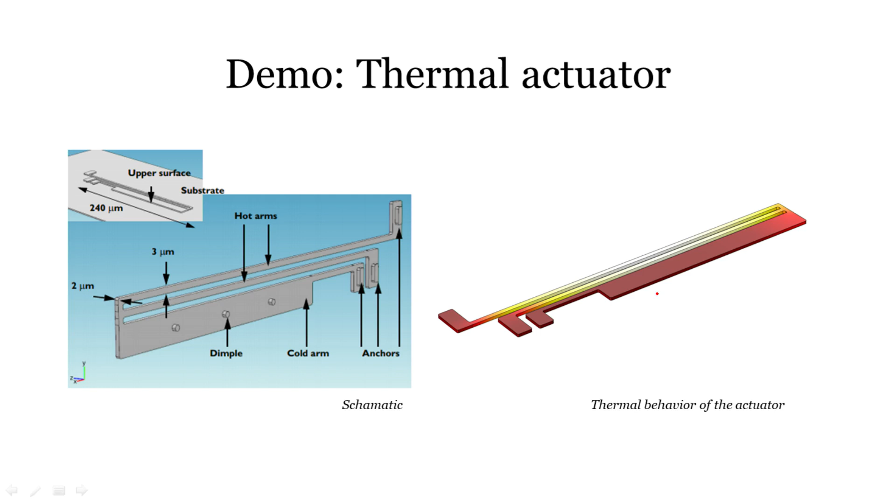within tens of micrometers. So let us see how to actually model this kind of a multi-physics coupling, because over here there are 3 physics that are going to get into the picture. The first physics is the input current that we give. Because of the input current or the voltage that we give, there would be a certain rise in temperature because of Joule losses, and because of the Joule losses there is going to be some kind of thermal expansion, because each material has its own thermal expansion coefficient. This is what we are going to couple.

We are going to couple the electrical physics with the thermal physics and the structural physics, which leads to deformation. Our end goal is to see if we change the voltage, how much is the maximum displacement the thermal actuator gives. So let us go and try to understand the physics step by step. The first physics is the electrical physics.

So in the circuit that you can see over here, we actually are going to apply a particular voltage at one of the edges over here, that is one of the anchors over here, and we are going to put the ground somewhere over here. The voltage which we give could be actually coming through a very big circuit. Let us now go to COMSOL.

So this is the first screen that you will see once you open COMSOL. If you are a little bit experienced, you can go ahead and make a blank model. So you don't need to add any physics. Just one click will lead you to a completely new, blank model. The model wizard is a step by step process to make or initialize your model. So let us click on model wizard, and it's asking us for the space dimension, whether you want to make a three-dimensional object, 2D axisymmetry, 1D axisymmetry, 1D or 0D. So let us go ahead with 3D.

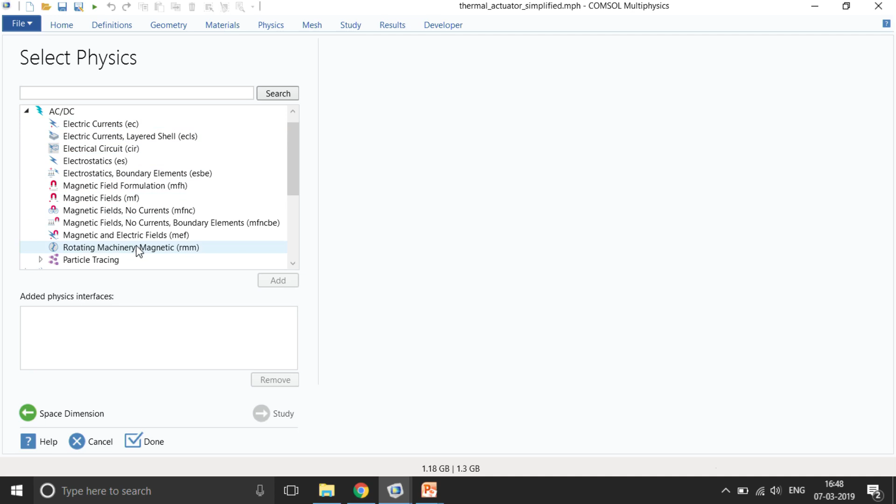So let us go into the AC/DC module. So this is the AC/DC part, and in this AC/DC part there are a lot of different interfaces: electric currents interface, magnetic fields interface, rotating machinery magnetic interface where you can model motors. As of now, we will go ahead with only the electric currents. This specific interface is to model currents through conductors. If you are talking about capacitors, then you need electrostatics. So let us go with electric currents and add.

So I can go to the next part, the study. Here there are many different kinds of studies we can perform. We can do frequency domain study, which allows us to do harmonic input. We have stationary study, where we can do a steady state analysis, that is we give only a particular voltage. Then we have time dependent study, which gives you transient analysis of your complete system. So all these three different kinds of study can be performed. Along with this, we have small signal analysis, wherein we give a particular DC bias along with the AC component. So let us go with a stationary analysis and click on done.

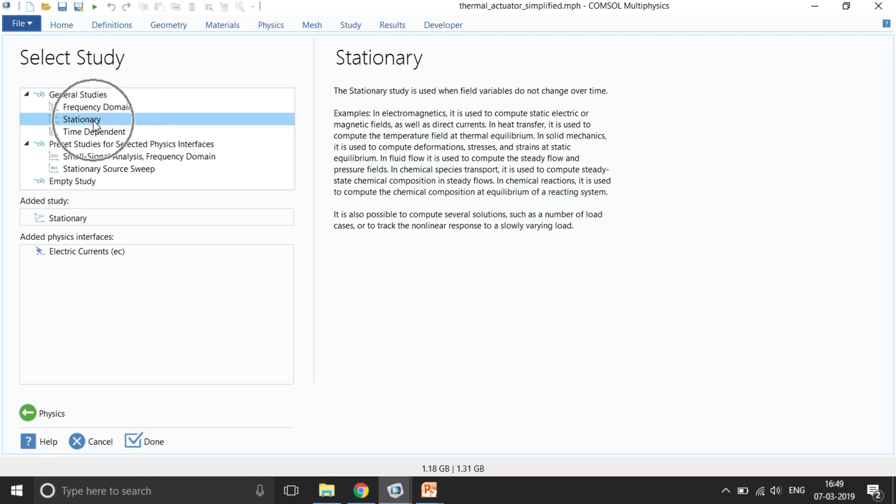So the approach that you can follow in COMSOL is the top to bottom approach. That is, you first create the geometry, add the material, add the physics, then perform the meshing, then you choose which kind of analysis you want to perform, and finally the results. So this is a top to bottom approach that usually is preferred in COMSOL.

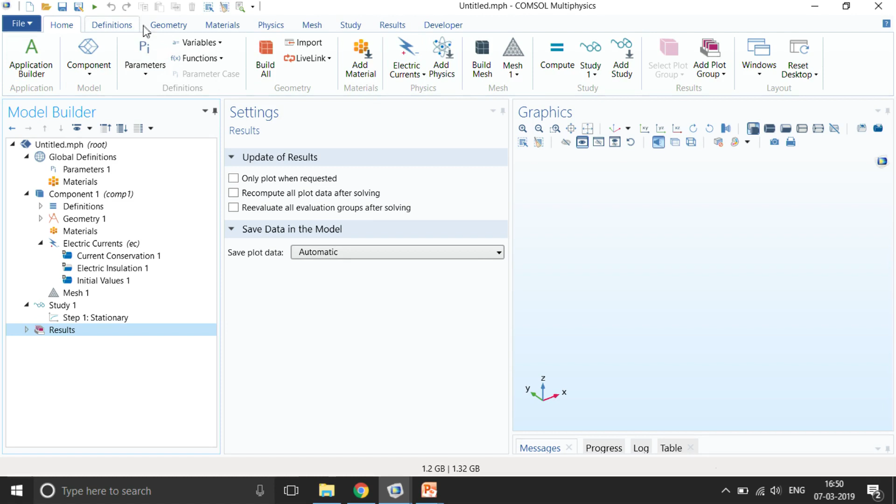One more approach which is preferred is in the ribbon pane that you can see in the top. Here you can see the same thing that you have already seen in the model builder. You have to first create the geometry, add the materials, apply the physics, perform the meshing, choose which kind of analysis you want to perform, then finally the results, that is to analyze your results.

We also have one more block as developer, that is if you want to write your own code along with the code that is being solved by COMSOL. So the first thing is to make the geometry. However, to save the time, I am going to import the geometry. There are two ways to import the geometry.

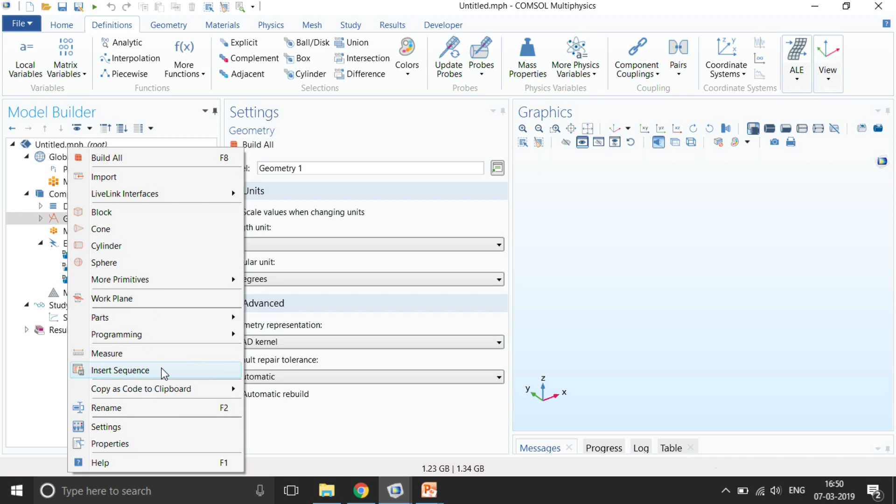One is to import through some other tool, any other CAD tool, and if you want to insert a sequence, which is like a step by step process to make the geometry, from a pre-built COMSOL file, you can use insert sequence. So let me choose insert sequence, and I choose the model that I have already created, and I click on zoom extents. So this is the geometry that is already available in the library file.

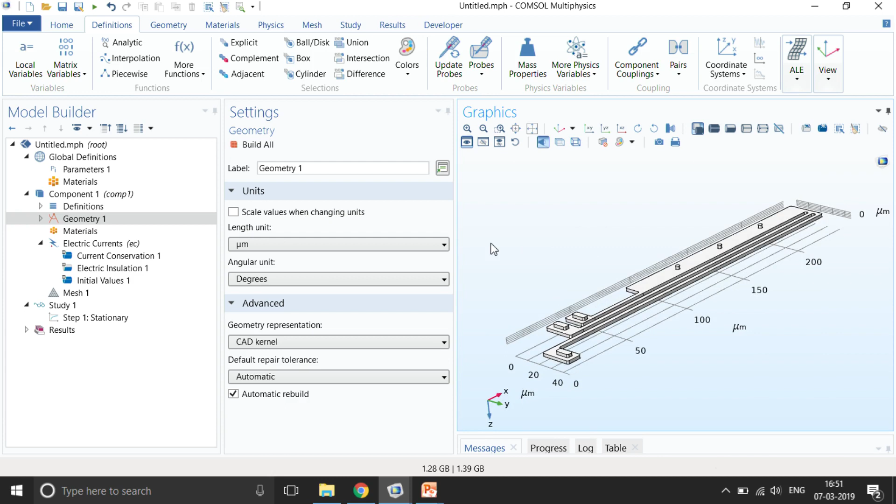So if you want to go through this example model, which is also known as thermal actuator, you can go to file, application library, and just search for thermal actuator, and you will see the thermal actuator model file available over here. So I have added the geometric sequence, as you can see over here.

The next thing is to add the materials. So let me just add the material by right clicking the material, add material from library. I can go ahead in the built in, and I can have the polysilicon material property.

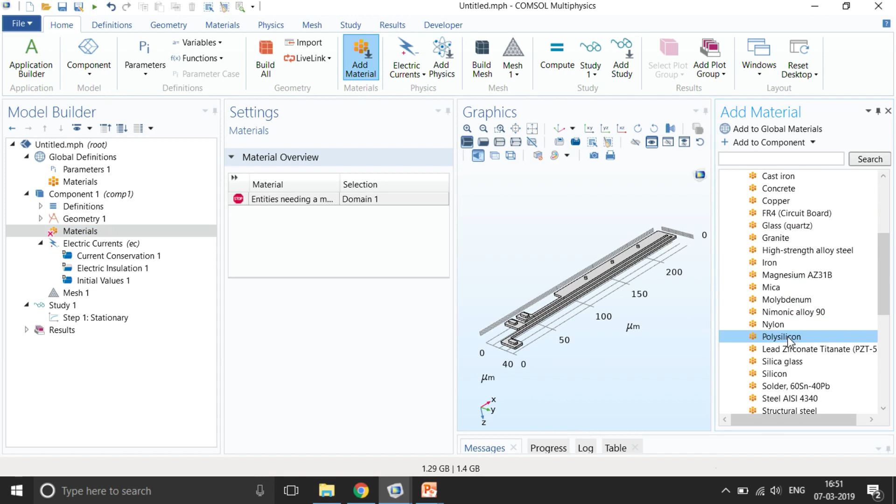Now we can see that over here the material property includes electric conductivity, which is defined as sigma as a function of T. This T is the temperature. What it means is that sigma is not constant, it is a function of temperature.

If you want to see what the relationship is, you can open this polysilicon and then go into the analytical function which defines the conductivity, and if you plot it, you can see how the conductivity is decreasing with the increase in the temperature.

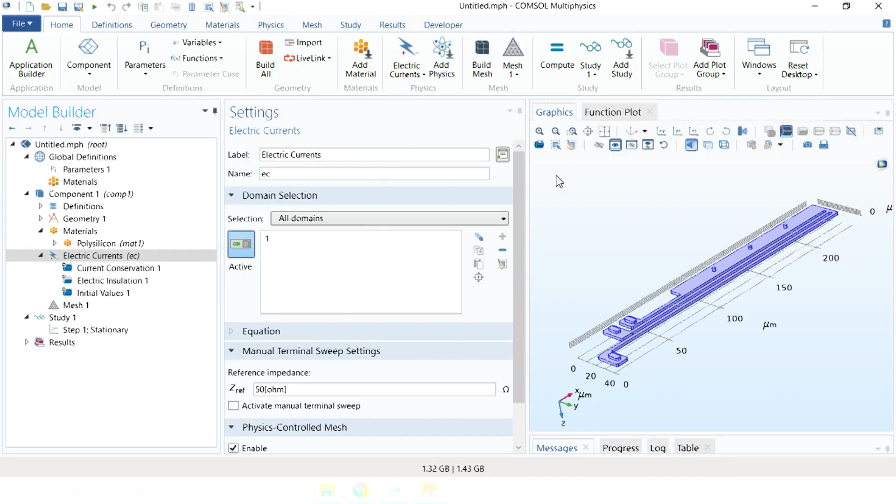The next thing is to give the physics boundary condition. As you can see over here, we apply a particular voltage at this anchor and ground at this particular boundary. There are different ways of applying the boundary. For example, you can use electric potential. Another way is to use terminal if you want to evaluate the resistance offered by your system.

For example, I want to know the resistance offered by a system. So, I will go ahead with the terminal and I apply that particular boundary over here, and I give the terminal type as voltage, and I choose the voltage as V naught. So, right now you can see that it is showing unknown variable, because we have given a variable name, but we have not defined it in the parameters.

So, let me go to the parameters. All these parameters have already come up, because we have imported a sequence of geometry steps. So, these parameters are defining the geometry steps. Let me define now V naught, which is around 5 volts, that is the operating voltage.

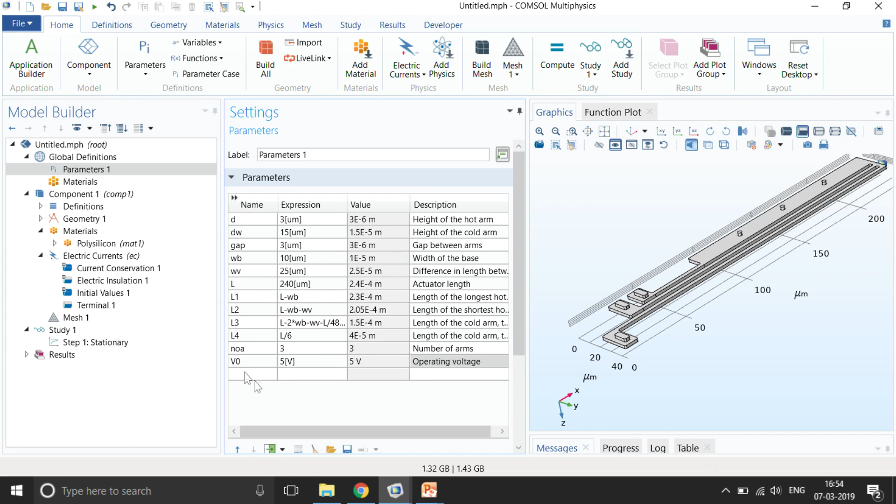So, now the error has ceased to exist. So, there is no error. We have given a voltage over here. So, let me also give a ground boundary condition on this particular part over here.

Let me go to the mesh and click on build all mesh. So this mesh that you can see over here is fine enough. If you want to improve the mesh, you can directly go to fine or finer. With me, I think fine should be good enough.

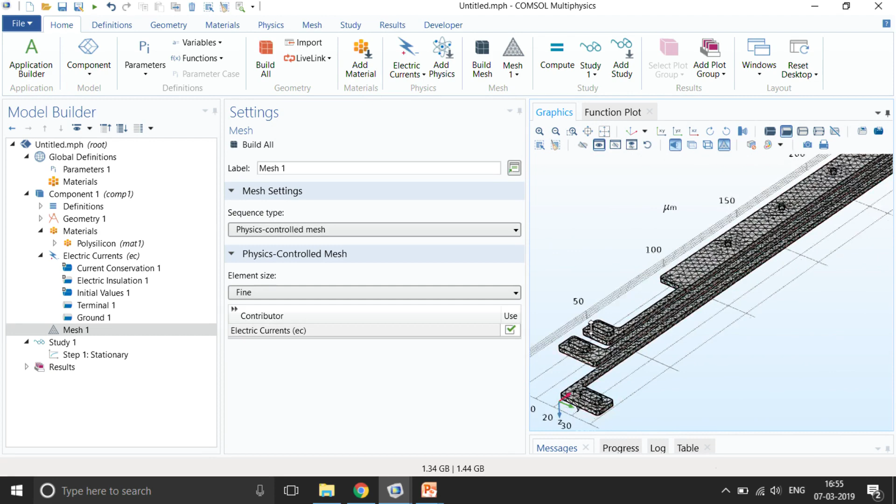Now you can see that your dimple was actually cylindrical, but over here it is not even a cylinder, right. So this mesh might not be sufficient enough, because your geometry might be having the cylinder, but the physics is going to be solved only how the mesh is being represented, so it's actually going to solve the way the mesh behaves or looks like. So we need to go ahead and increase the meshing.

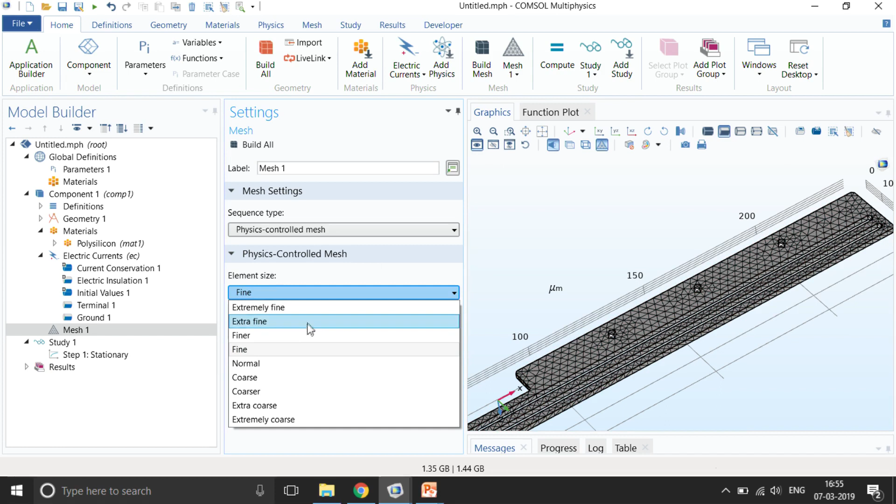Let me go to finer, and now you can see that the mesh has nicely resolved the cylinder, right.

So now this is what looks good to proceed further. Let me go to my study 1. Let me write electrical study. So my study 1 is electrical study, where I am only performing the electrical analysis. Let me go to compute and click on compute.

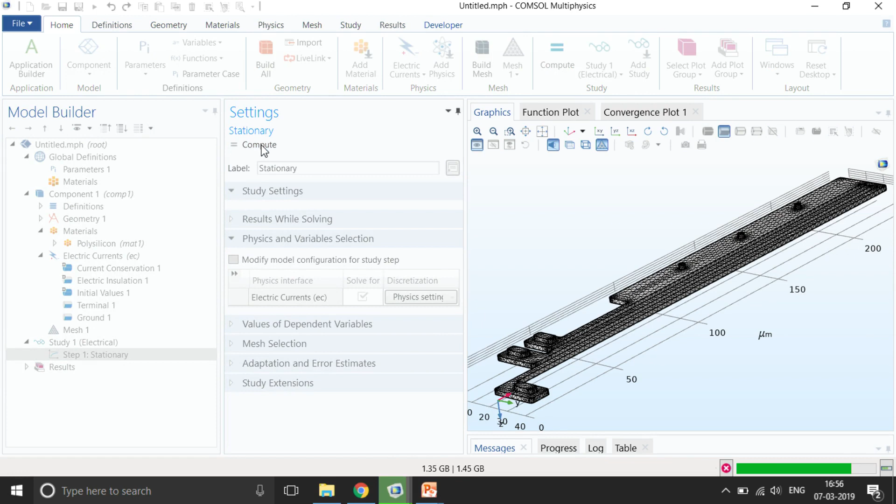So now you can see the voltage distribution, or the potential distribution, along the polysilicon.

Now if you want to see the current distribution, the current profile, there are many ways to see it. The first way is to know how the current is flowing through. One way to do that would be to right click on the results, 3D plot group. In the 3D plot group, I can create an arrow volume. In the arrow volume, I can search for the current. So in the replace expression, I can search for the current density and click on plot.

Still now I am not able to visualize the current properly. Ideally, the voltage which shows that it is very high over here and it is decreasing like this, right - so our current profile should also be similar to the gradient of your potential. The better way to recognize it would be...

...to change the grid points. So let me just go ahead and change the grid points. Hopefully we will be able to see those. So in x and y, I need to increase the grid points, and in the z point, let me use only 1.

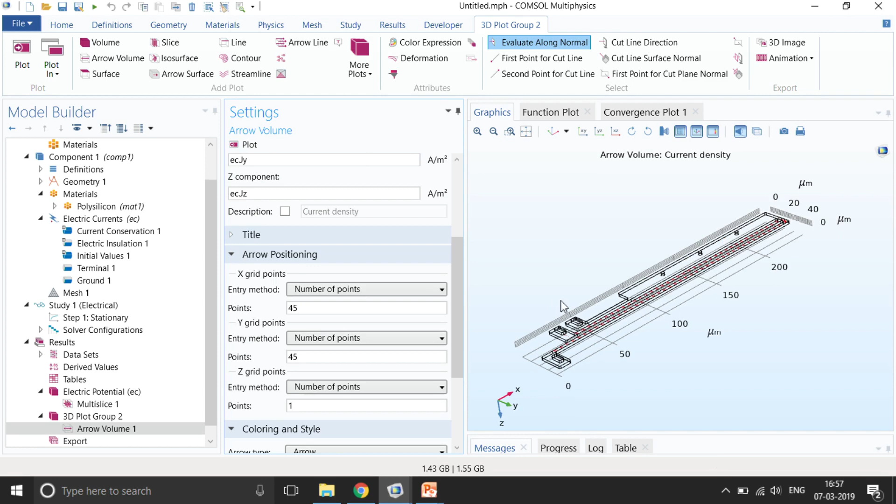And now you indeed are able to see the current flow. So now you can see that the potential which was applied very high over here is actually making sense, because the current is actually flowing like this, and it is going to turn over here, and then it is going to move back towards the minus x direction to the ground where you have given it. So this actually makes sense, the results make sense.

So it is always good that once you actually get the results, you also validate the current profile, how much voltage you are getting, to revalidate that whatever input you are giving is actually being conceived by your system.

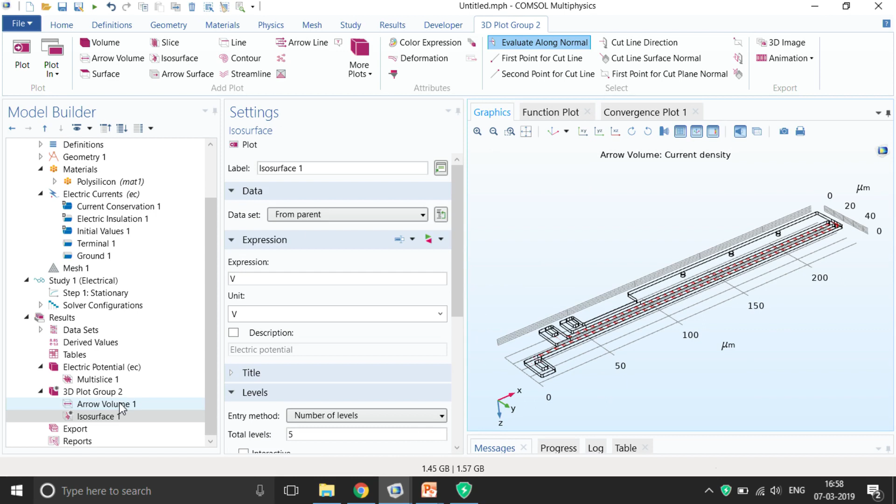Okay, so the next thing is to understand there is a current flow, and we need to understand where the current flow is going to be very high. To understand that, what I will do is create one 3D plot group, and I can create one multi-slice plot.

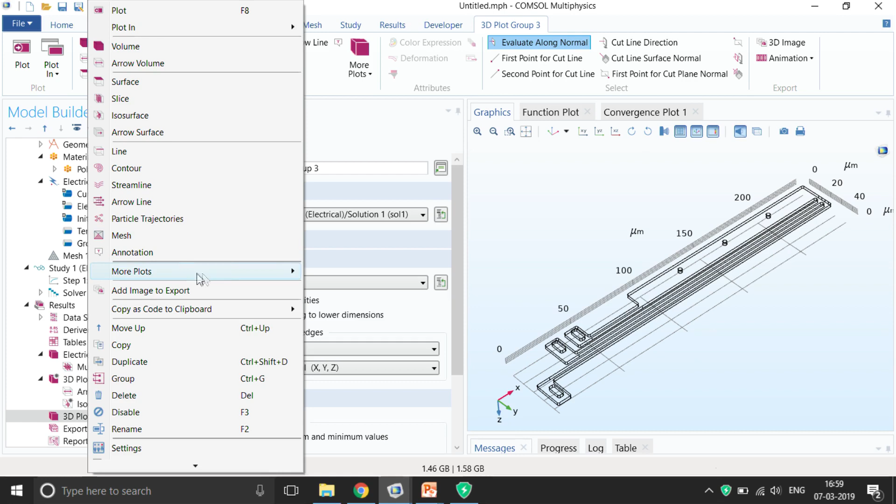Multi-slice plot would be somewhere in the more plots over here, and I can search for norm of current density. So I can just search about current density, and now you can see that the current density is very high somewhere over here, that is in the thin leg over here, and over here.

This means that the current density at these particular legs is very high as compared to the other domains. So that also means that the losses, which are proportional to the current, are also going to be higher at these particular legs.

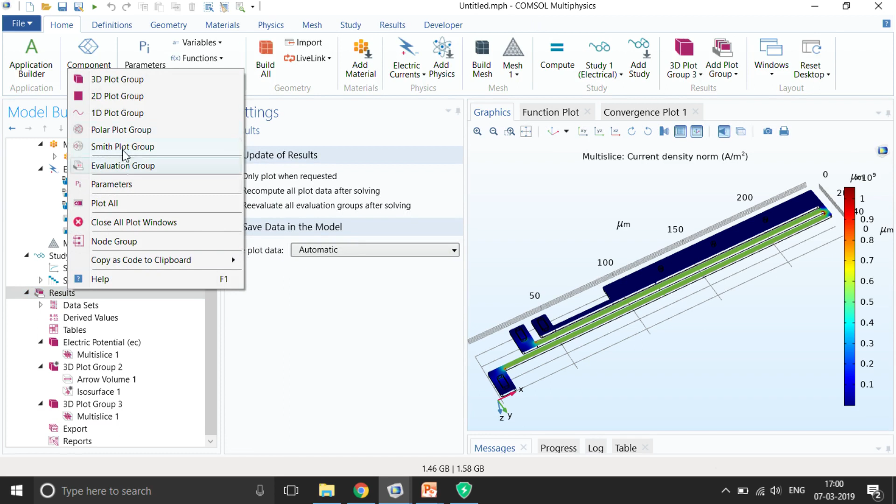So let us also see now if there are losses because of the Joule losses, and how I can evaluate this. One way to see it would be again the multi-slice plot. So I can create a 3D plot group by right clicking on the results, and I can create one more multi-slice plot, and I search for losses.

I have volumetric loss density and volume, that is complete electromagnetic, and then only the electric part. There is no magnetic component, so we can choose any one of them. Let me choose QH and click on plot, and indeed that's what it is showing me.

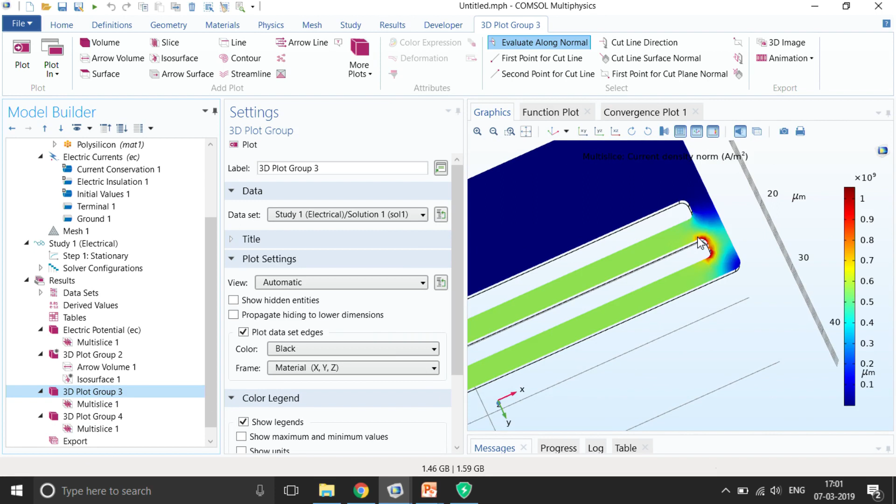The losses are very high at both of the legs. You can see over here, thin legs. It is even high at the corners, and that's the same thing the current density was showing, that wherever the current density is high, the same place the losses are going to be very high. So these losses are, as you can see, in order of watt per meter cube.

Now you still have the losses, but you don't know what change in temperature the losses are going to lead to. This system is working with some ambient temperature, but you don't know that yet because we have not assigned it. So let us set up a thermal condition to see how the temperature rises if we give a voltage of 5 volts at room temperature.

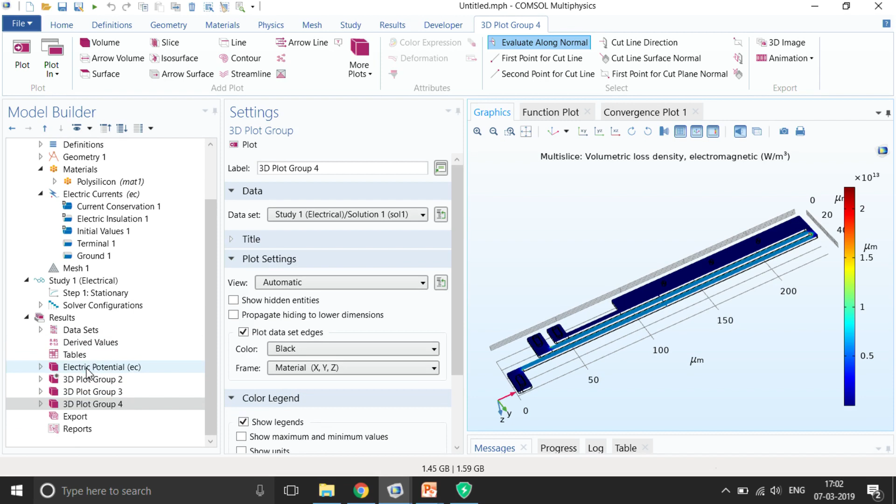Before that, since we have many studies coming up, to reduce the complexity I will group my results. So I select all of them, right click on the results on the selected nodes, and click on group. So my group 1 is electrical analysis.

The next part is I am going to add the thermal physics. So I go to physics, add physics, and I add heat transfer in solids.

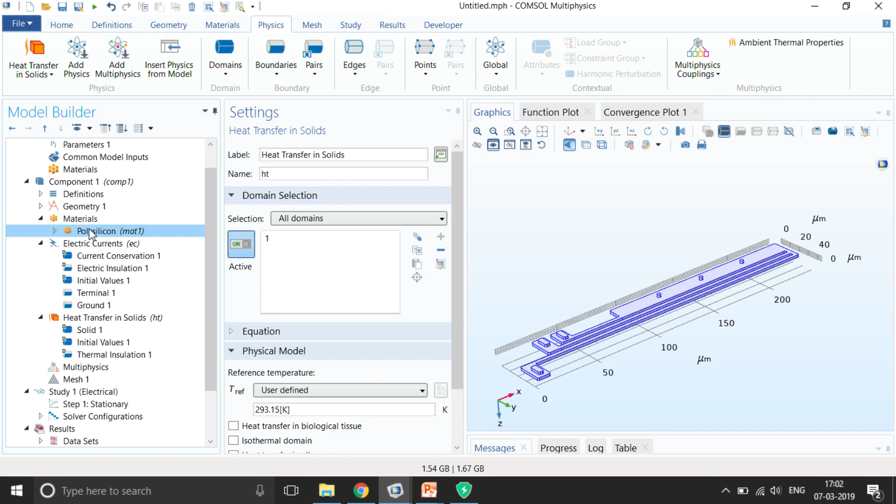Now you can see that if I go back to my polysilicon, earlier only the electric conductivity and the permittivity had a green tick mark, but now as we have added the thermal physics, the heat capacity at constant pressure, the density, and the thermal conductivity have been activated. You can see that the thermal conductivity is a function of temperature. The capital T now is actually coming from here once we do the coupling.

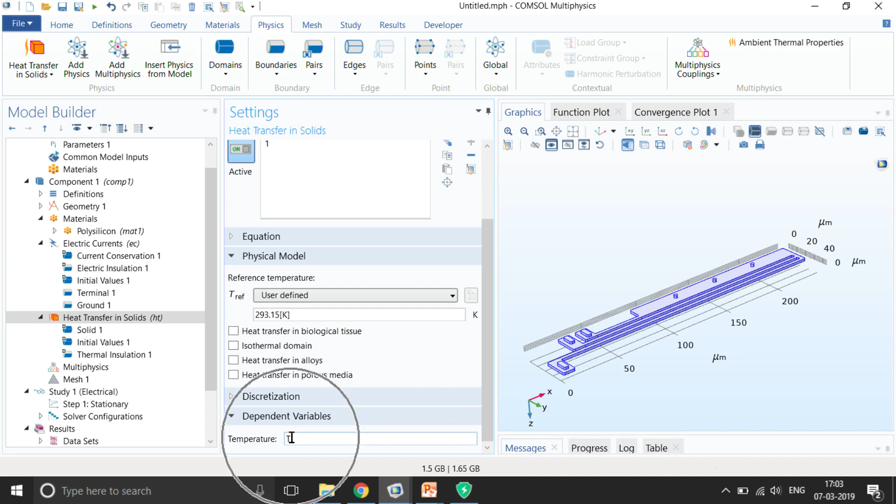Even the electric conductivity, as a function of T, the capital T would be coming from the heat transfer in solids.

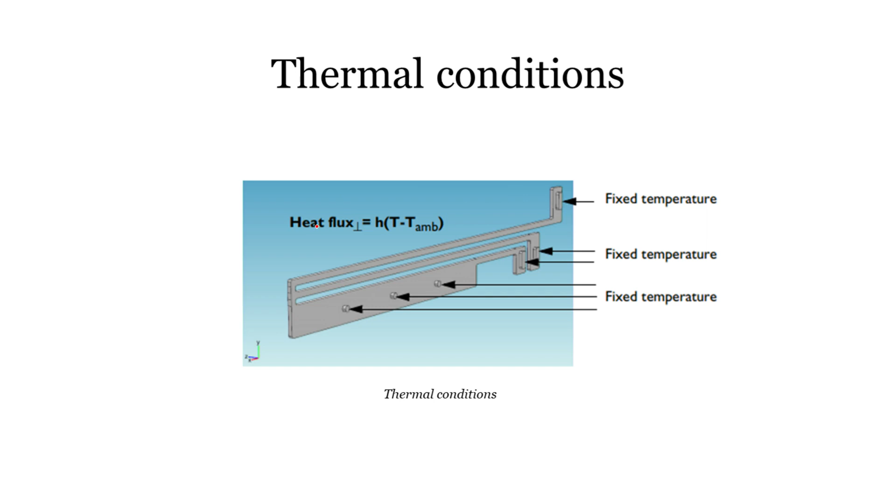Let me go over to the thermal conditions. As you can see, we would be giving fixed temperature to the places where we have attached it to some other boundaries. For example, the dimples over here, this one and this one, which are on the cold arm, and the anchors, which are this one and this one. All the others we are going to give a convective heat flux with a heat transfer coefficient of value 5.

So let me go to physics, and now let me add the fixed temperature. To add the fixed temperature, I right click on heat transfer in solid, go to temperature, and click on these boundaries, and by default this is the room temperature, as well as the top of the dimple, which I click as well.

So these boundaries are going to be attached, or tied up with a particular temperature, and it cannot increase from that.

Now we are also going to add the convective heat flux. To do that, just right click on heat transfer in solids, and use the heat flux boundary condition. I choose those, left click on my graphics, and then use Control A. That selects all the boundaries, and now I need to deselect the boundaries of the anchors and the dimples.

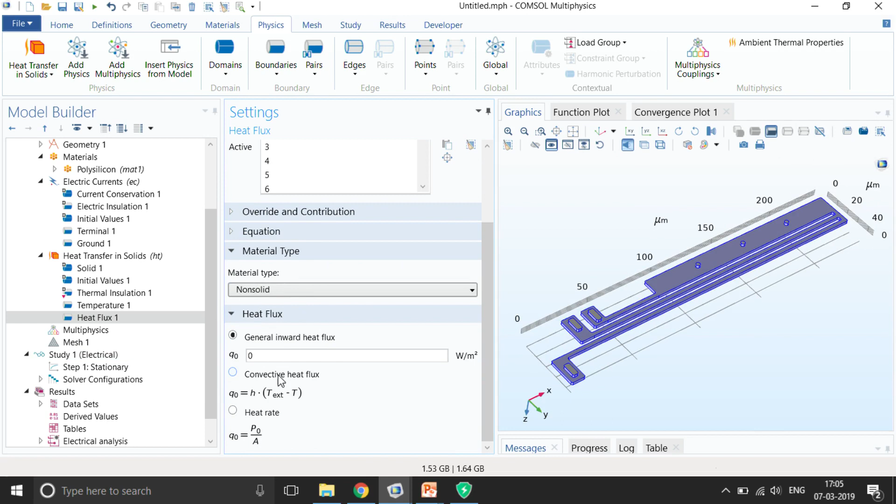The next thing: are we giving an inward heat flux? No. Are we giving convective heat flux? Yes. So I enable this, and I also need to give an external temperature which is room temperature by default. That looks fine, and the heat transfer coefficient is 5, which means there is air surrounding this particular system, not even airflow actually.

If there is airflow, the heat transfer coefficient would increase. If there is water cooling the system, it would increase even faster. So this kind of heat transfer coefficient depends upon the ambient temperature and the cooling condition you are trying to give. For example, you can also give external natural convection, internal natural convection, external forced convection, and internal forced convection. These are all the options available.

So we are done with the physics, with the thermal physics. If you want to go back to solid 1, you can see the actual equations being solved. Similarly, in the current conservation node, you can see the actual equations being solved by the electrical physics.

Now coming to the coupling part, how the electrical physics and the heat transfer physics are getting coupled. If you were careful, you would have seen that this multiphysics node was not there before, but now it has appeared because there are two physics that need to be coupled. There are many automatic couplings, and in addition to that, there are also manual couplings.

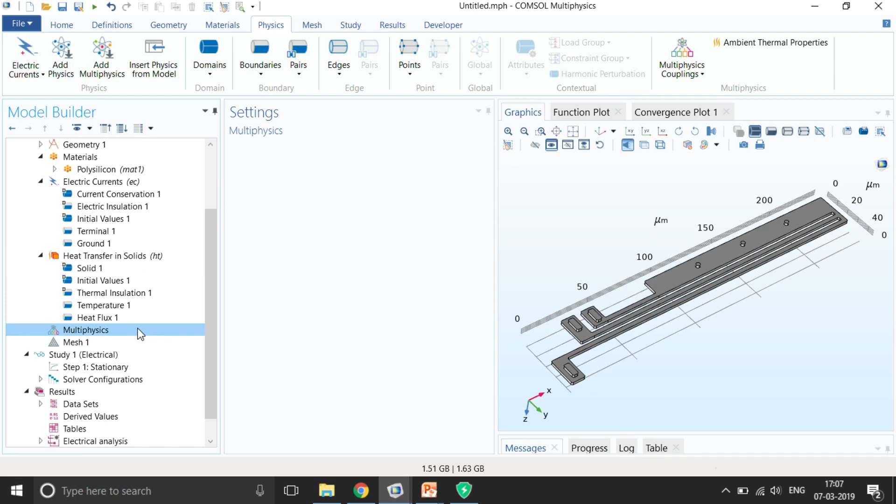So if you want to add the automatic coupling, just right click on the multiphysics node, and you can see over here the electromagnetic heating. So let's click on the electromagnetic heating.

This, as you can see, couples your domains and the boundaries from the electric currents to your heat transfer in solid interface. So whatever losses that were getting accumulated by your current that is going to flow, all the Joule losses are going to get transferred into the heat transfer in solid part, and that would be responsible for the rise in temperature. So now let me go to the mesh.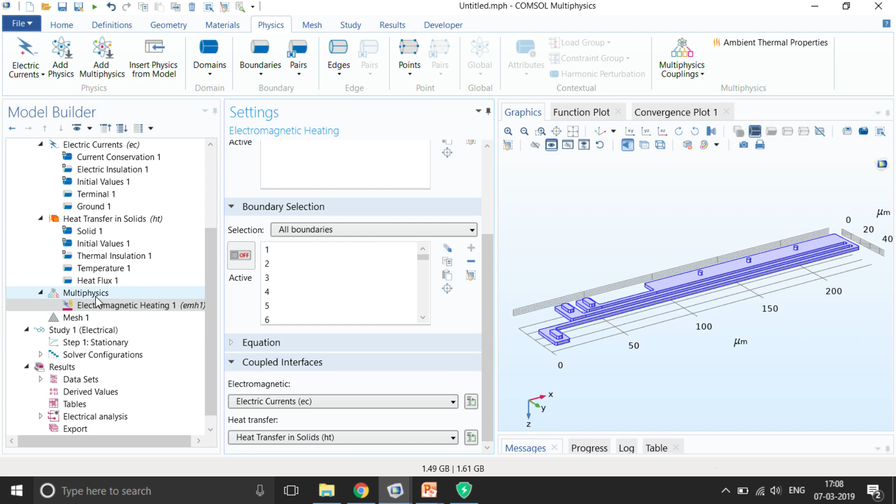Okay, I need to add one more multiphysics coupling, that is temperature coupling. And let me go to the mesh. There is no change in the mesh anyways, so we can now go ahead and add one more study.

So I go add one more study, and over here I add one more stationary study. Over here I write electrical and thermal analysis, because we are going to do both now, and you can see that both have been activated over here with the multiphysics node.

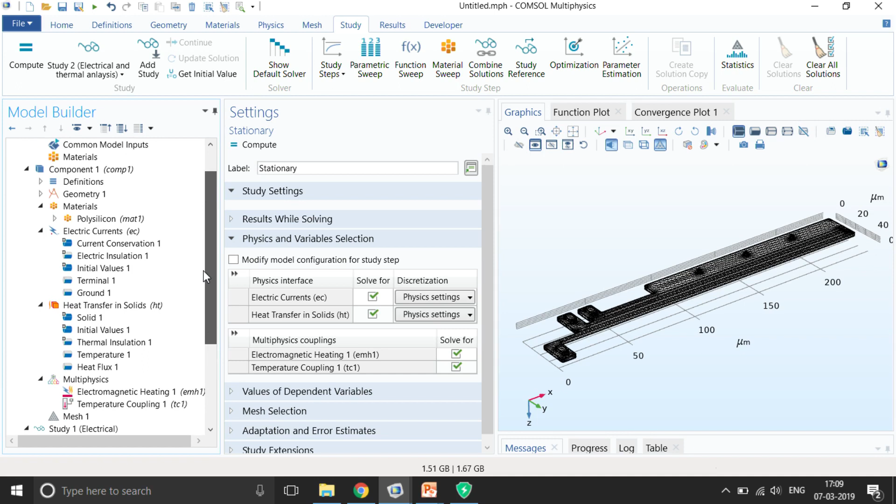It is very important to note that your results would be accurate enough only if you match your material properties as much to your real properties. If it deviates from your actual experimented material property, then the results also will deviate. So it's very important to come back and see to the materials that you are using, because this is very important.

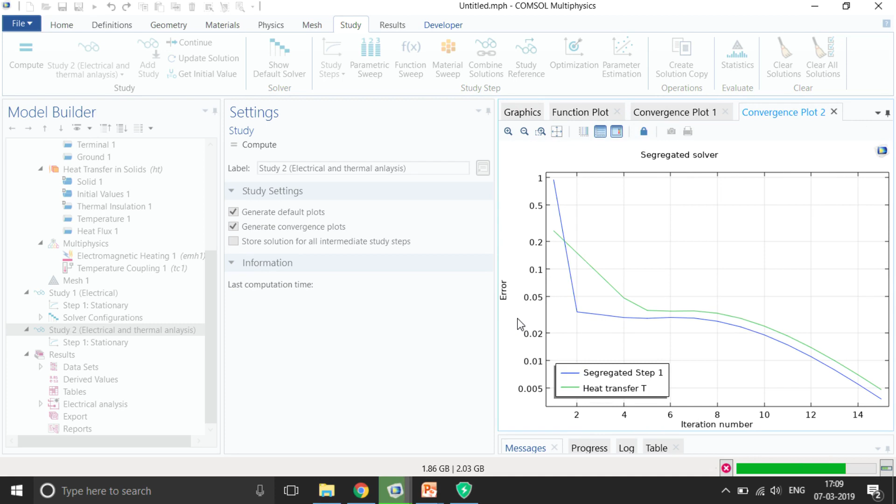Okay, so let me go to my study 2 and click on compute. You can also see the convergence plot with the error. You can also manually tweak the amount of error that you want to use, that is a relative tolerance error that you want to use to make the system converge.

So now you can see the first plot is electric potential, the second plot is the temperature, and as we know, as we also have seen before, the temperature rise would be somewhere over here, right? Because if you see the electrical analysis in the losses plot, the power losses plot, this is the power loss plot that you can see over here. There are a lot of heat losses over here.

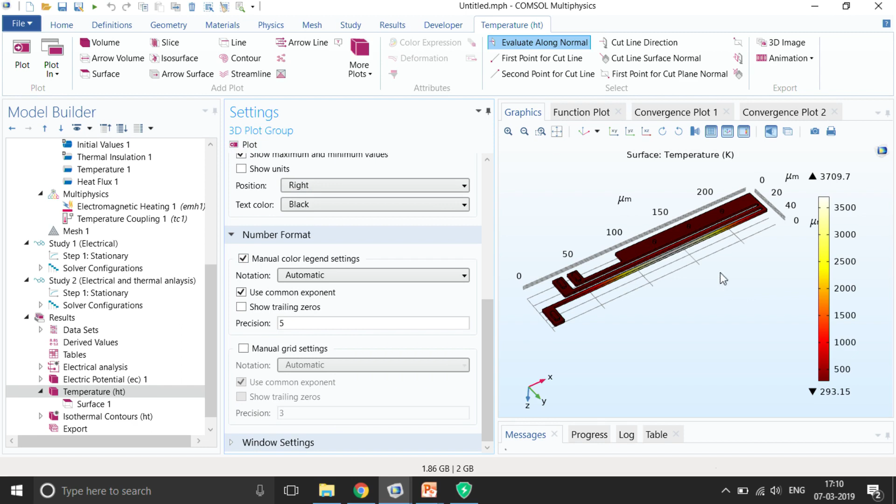So this is the temperature plot. Now for example, you want to see the maximum and minimum values over here, you can see over here. If you want to see the actual values without the exponential part, you can come to the number format and use the precision values, you can increase that.

So like you can see that it's very high temperature. And it's also important to note that COMSOL is a tool which will help you to give the results, but it will not help you to tell that if it is going to melt or not. This is the part that we have to do by ourselves.

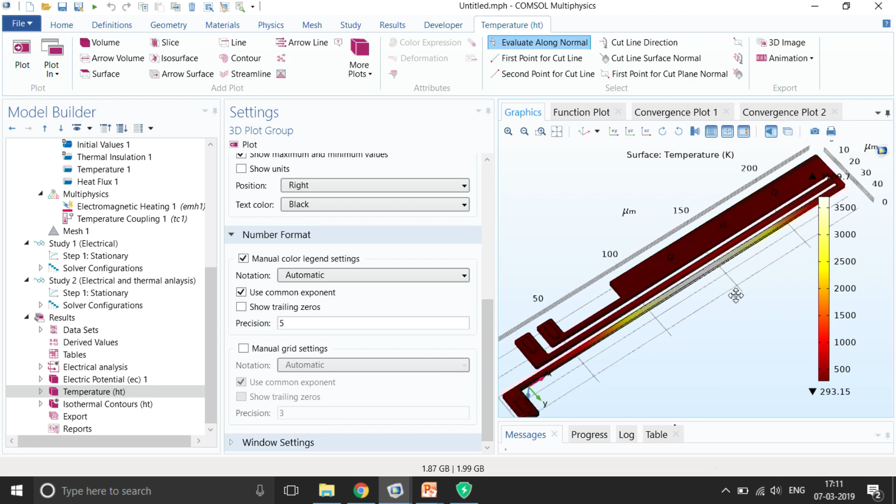For example, if the melting point of our system is around 2000 Kelvin, right? COMSOL will not tell you that the temperature has risen beyond 2000 and give you an error. It will not give an error, it will tell you that it is still increasing the temperature, but you have to yourself understand that it's gone more than the melting point, and this is how it actually stops.

Now for example, you know the temperature and you want to see the temperature plot from this point to this point in a line segment. How is the spatial distribution? To do that, I can create a 1D plot group. So I right click on the results, I create 1D plot group.

And over here I right click on the 1D plot group and create a line graph. In this line graph I select which line I want to use. So let me use this line.

And I want to evaluate my temperature. One way is to directly enter the expression over here. One alternate way is to just click on replace expression and search for temperature. Before that, we have to be sure that we are using the dataset of study 2.

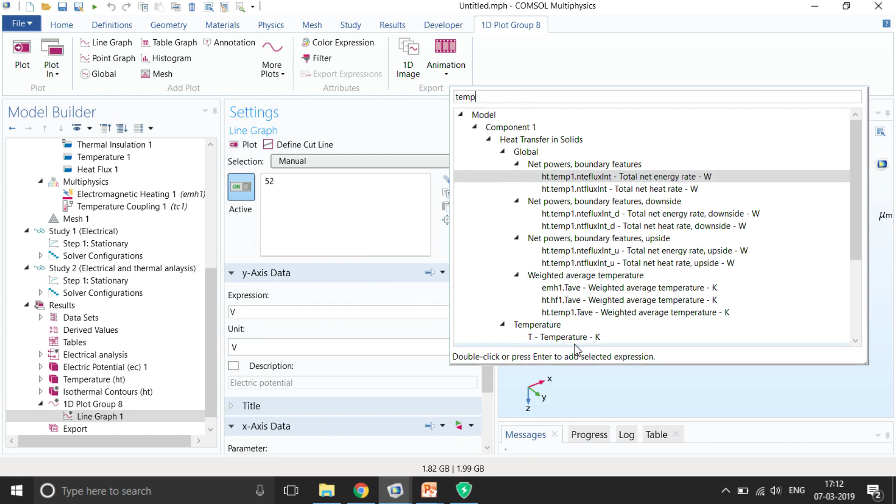So let me go ahead and choose my dataset at study 2, that is electrical and thermal analysis, and then search for the temperature. So you can see that temperature profile variable has arrived over here. So I double click on that, and whether I want it in Kelvin or in degree Celsius, I can use that and click on plot.

So now you can see the spatial variation of temperature along this particular line.

The next thing is to perform the structural analysis.

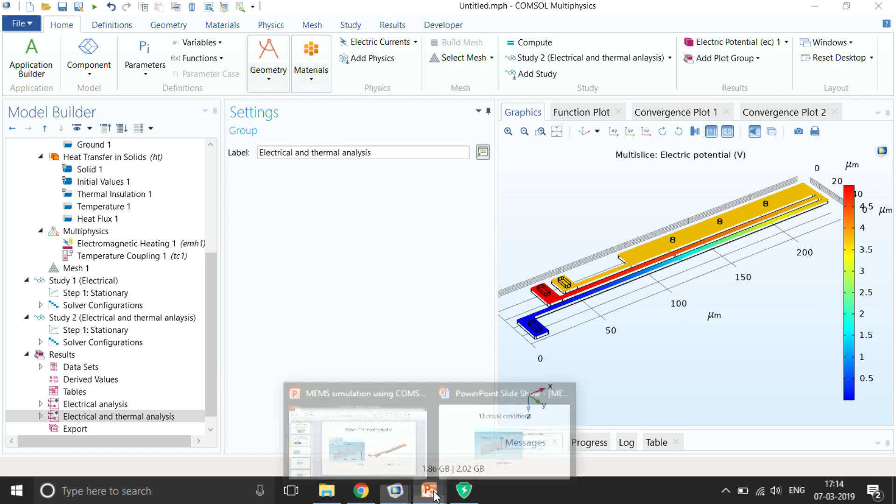Before doing the structural analysis, what I will do is again group my electrical and thermal analysis together, and I can write over here electrical and thermal analysis. The next part is to perform electrical, thermal and structural analysis. So let me go to my presentation and see how are the structural conditions.

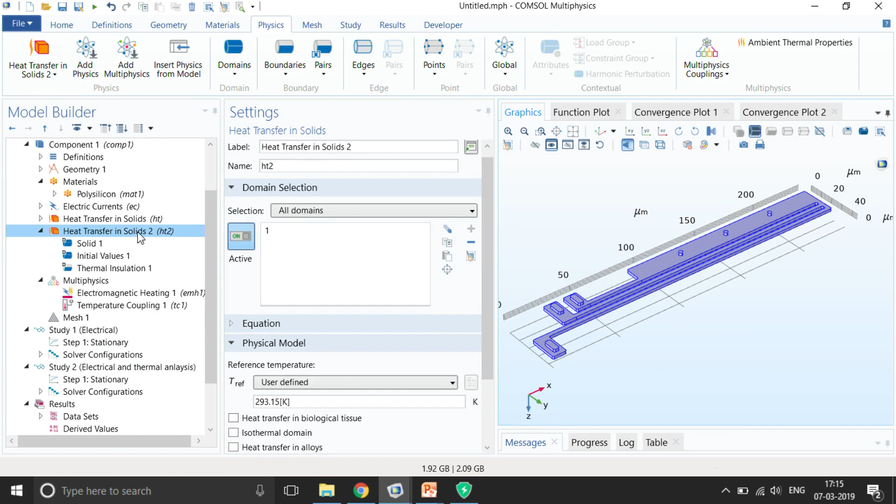So let us go to COMSOL and add this physics. We have already added the electrical physics and the heat transfer physics. The next thing, I go to the physics, add physics, and I add the heat transfer in solids. I just double click on this, and over here, oh sorry, I added the wrong physics. I need to add the structural mechanics. So I go to the physics, add physics, structural mechanics, and I add solid mechanics physics.

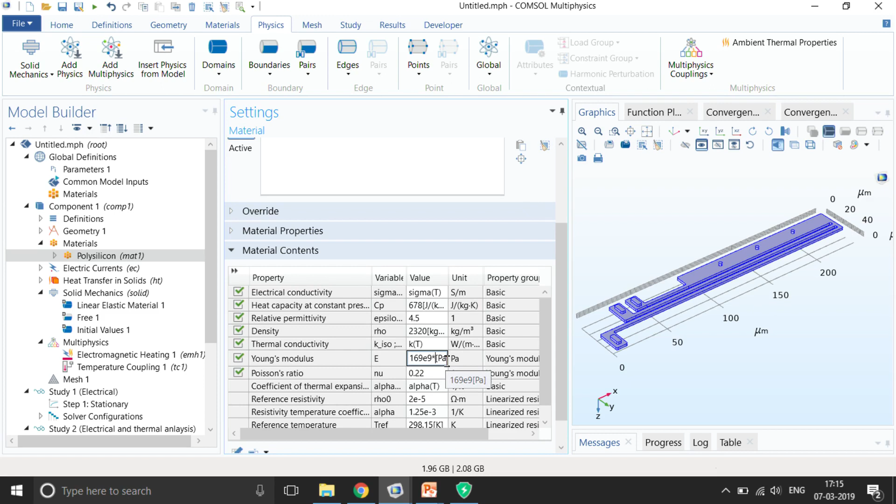Again we can go to the material section, and you can see now the Young's modulus has been enabled over here, the Poisson's ratio has been enabled over here. Both are a scalar value. If you want, you can make it a temperature dependent material property by just writing over here, for example, 300 divided by T. This is just for example. Let us go with a constant value.

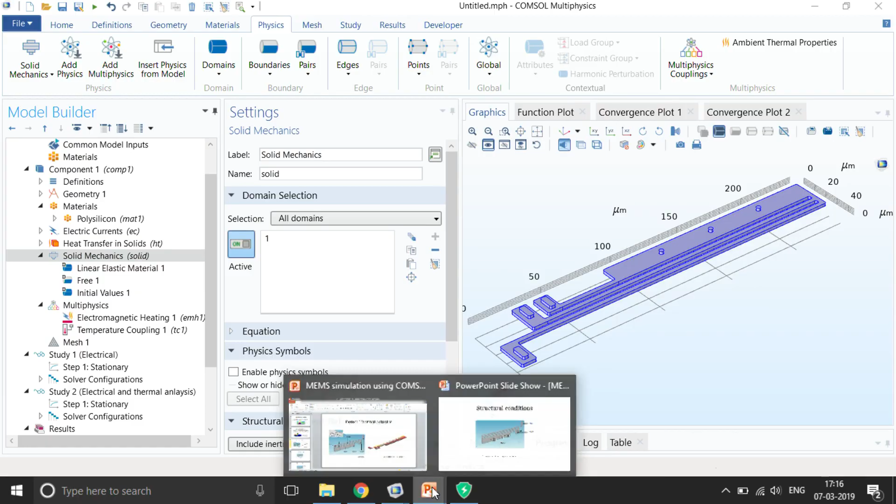In my solid mechanics, as you have seen, we are going to give roller boundary condition at the dimples and fixed boundary condition at the anchors. So let me right click on solid mechanics and give a roller boundary condition. You can see the equation. All the boundary conditions and domain conditions give the equations, so from the equation you can understand how the motion is going to be. It means the normal motion of your boundary is 0, while it will allow the tangential motion.

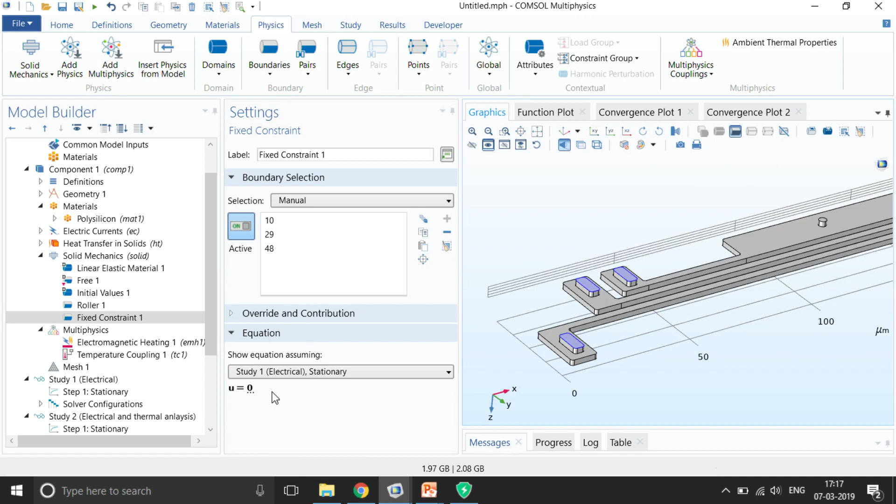Now we go ahead with the fixed constraint. Again right click on the solid mechanics, add the fixed constraint and choose this boundary. You can see the equation that u is equal to 0. So tangential, normal or any angular displacement are not allowed.

The next thing is again to use the coupling. We have already established the coupling from electric currents to the heat transfer, that is the Joule losses leading to the rise in temperature. Now we need to couple the rise in temperature to the structural mechanics using the thermal expansion. The way to add that would be right click on the multiphysics and then click on the thermal expansion. The other multiphysics nodes would not be of interest to you as of now. And then I add my domain.

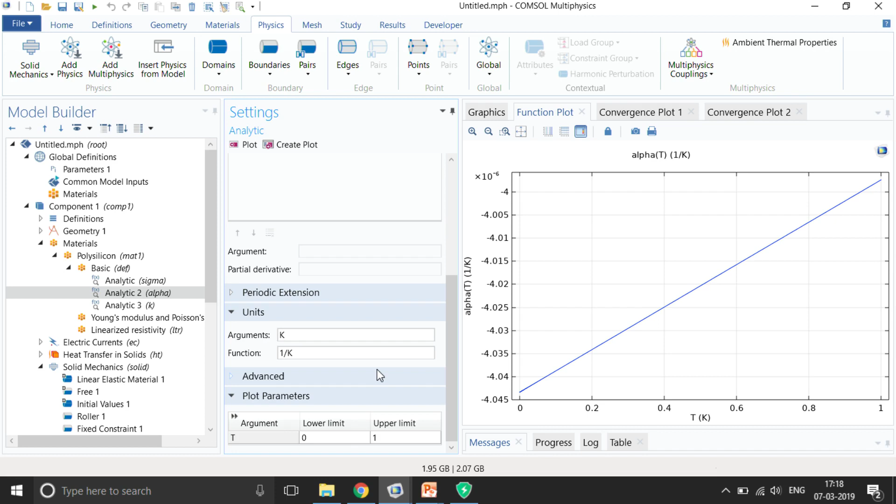Once I add this, you will see that the thermal expansion coefficient has been added. That is also a function of T. You can go within it and see alpha, how it is a function of T. So we have added the thermal expansion. We go to the study node and add one more study, a stationary study. In my stationary study 3, I write electrical, thermal and structural analysis.

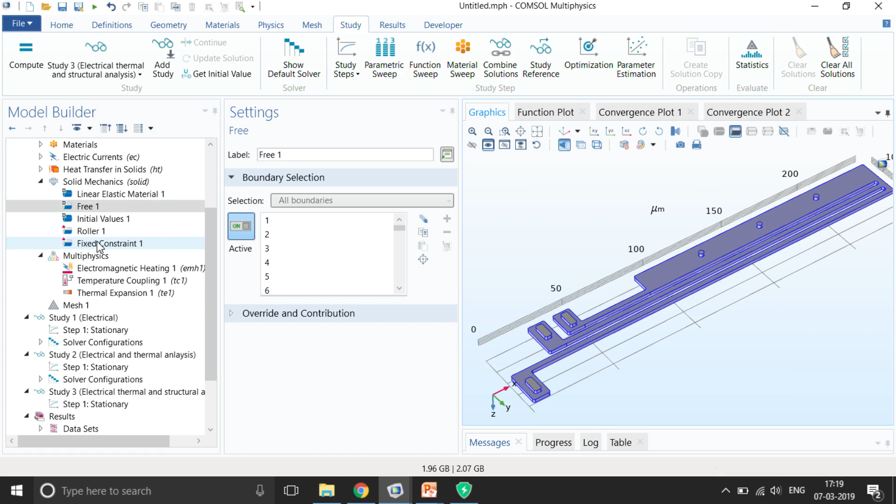And over here you can see that I have enabled all the 3 physics along with the 3 multiphysics nodes. You can see the rest of the boundaries are free. By default all the boundaries are free, but if you run a stationary, that is steady state, analysis with the free boundary condition, your problem becomes ill posed and you will get non convergence issues. So it's always good to assign some fixed constraint boundary conditions. So let me go to my study 3 and click on compute.

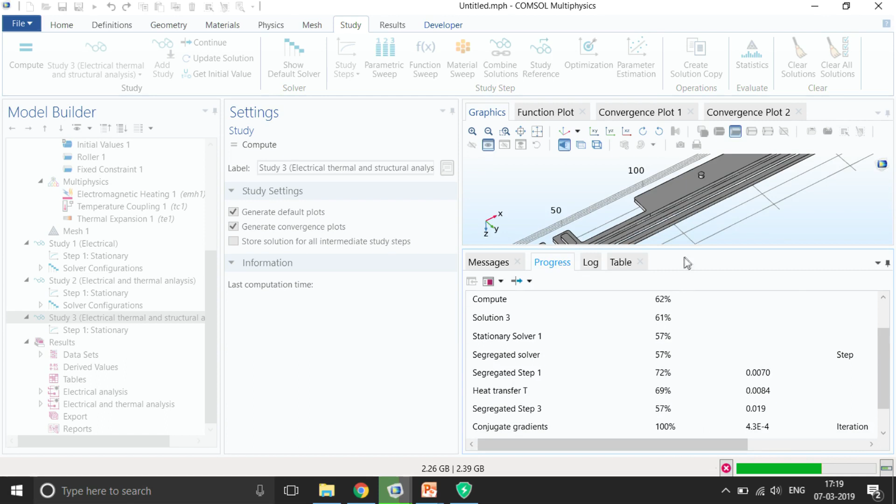In the progress bar you can see what solvers it is using and how many iterations. We are not going to cover in detail the solver configurations. You can see the convergence plot over here.

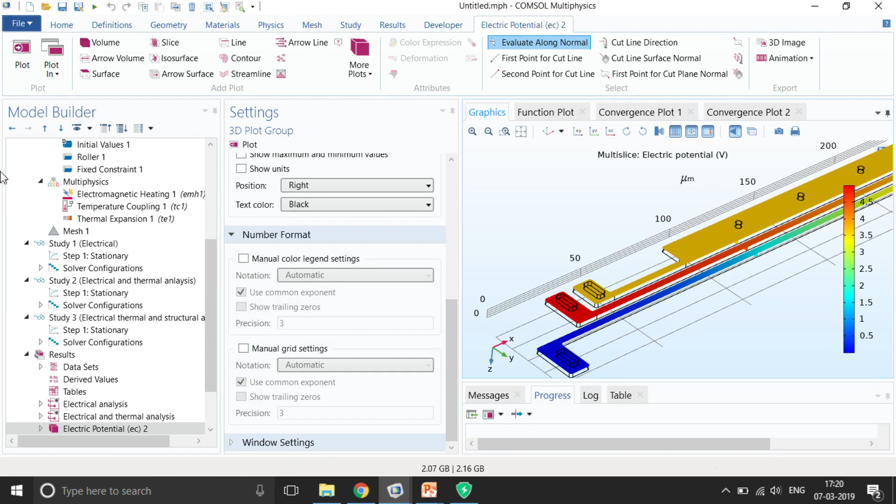Yeah, so you can see the results now. You have already seen the temperature variation, isothermal contours and the stress plot. So now you can see the stress which is being developed with the surface plot, and if you want to see it in Newton per mm square, you can just click over here and search for Newton per mm square or MPa, or you can just directly mention over here Newton per mm square. Click on plot. So we will see the stresses over here.

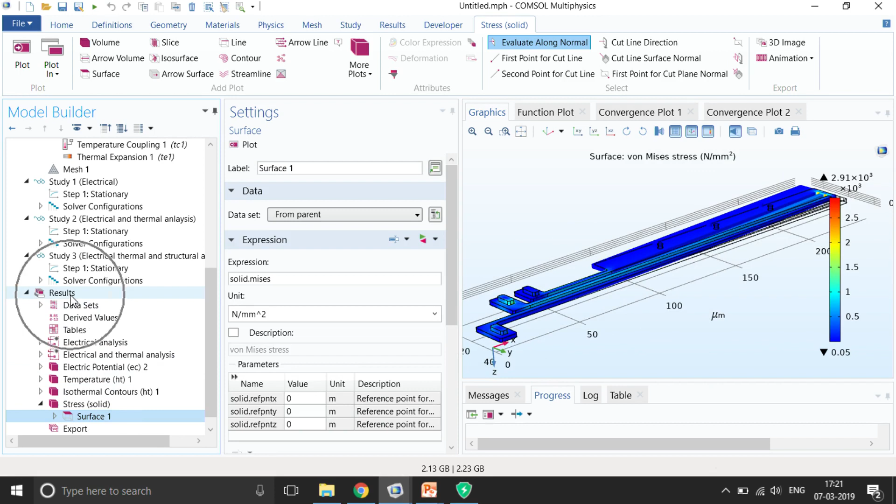You can enable the maximum and minimum values to see what those values are. If you want to see the displacement, you can just right click on the results, 3D plot group. In this I create the volume, and in this I search for displacement. Okay, again we have to see the data set with which we are studying. We are doing electrical, thermal, structural analysis. So let me choose this, and over here I search for displacement.

So you can see this variable solid.disp, that is total displacement. So let me choose this, and you can see the maximum. I can enable the maximum over here: a maximum displacement of around 21.2 micrometers somewhere over here.

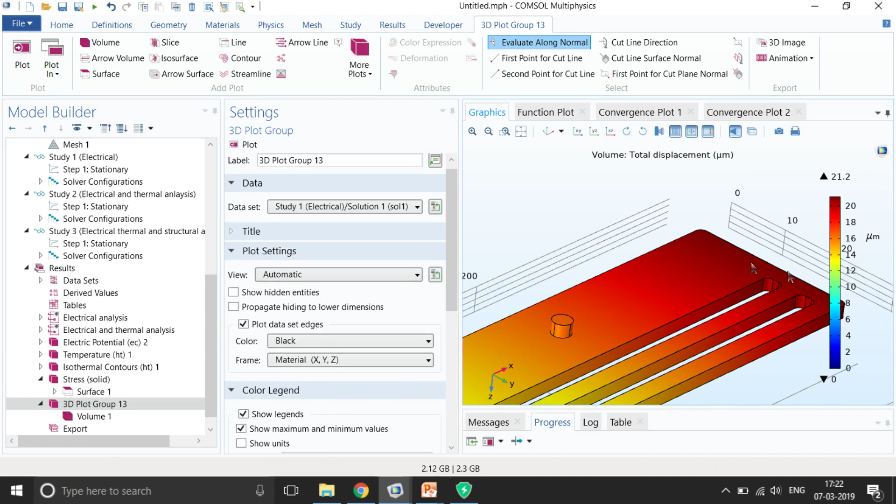Okay. Now if you want to visualize how much deformation is going to occur based upon the voltage that I have given, I can just right click on the volume 1 and click on deformation. I can set the scale factor as 1. So this is how much it's going to displace.

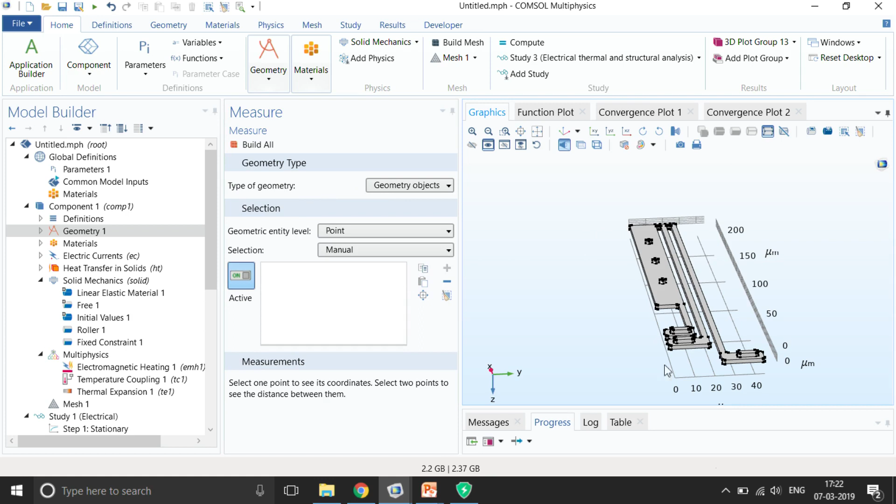If you want to see the length of this one, you can measure it by right clicking on the geometry, go to measure using the geometric entity level as point, and I can measure the length from one end to the other end. So it's around 26 micrometer. The lengths are not that big. Okay, sorry, let me start from this point and this point.

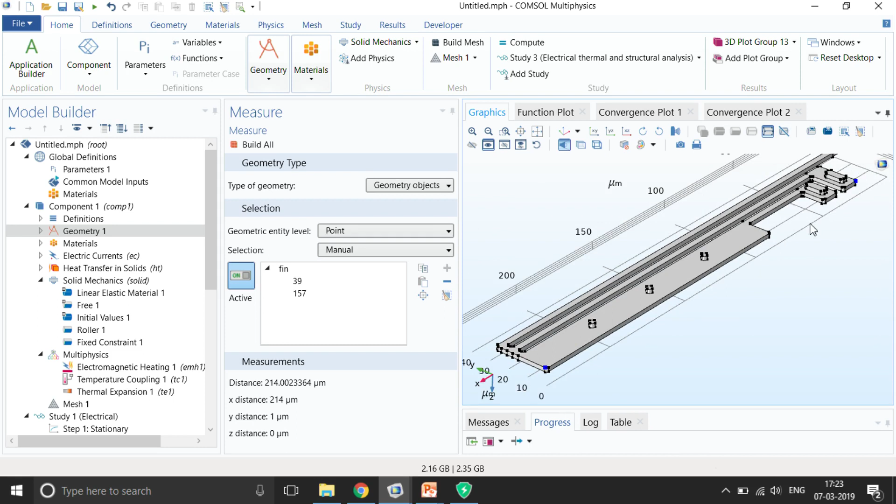Yeah, so the total length is around 200 micrometers, and that particular device is bending around 21 micrometers along the minus y direction. Okay, so that's good enough.

Now, however, I want to know if I change my potential, how much my displacement is going to vary. In addition, I also want to see the maximum temperature occurring within my system as I change my voltage, because my polysilicon would also have a melting point. So let me just go to the internet and search for the melting point of polysilicon. It is around 1400 degrees Celsius. So now I have a threshold value that the maximum temperature should not exceed.

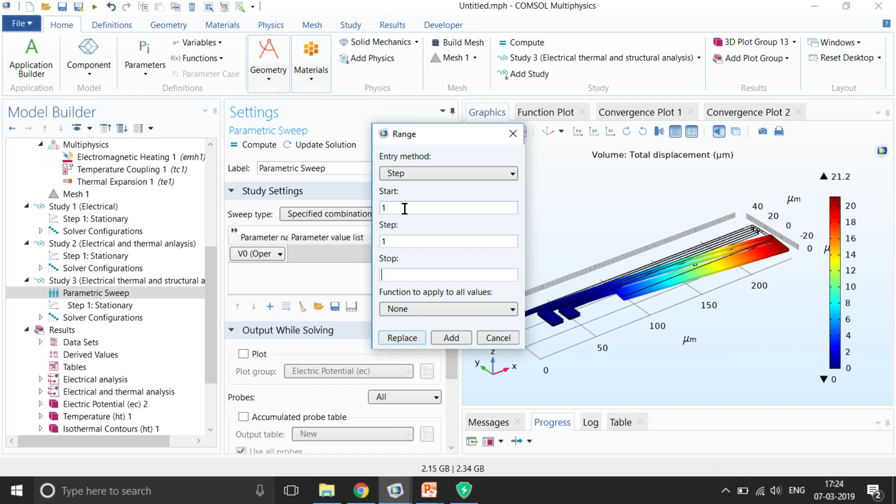So now what I can do is sweep my voltage. To do that, I can just right click on study 3 and do a parametric sweep, and over here I can add my voltage V naught, and over here I can write the range. I can just click on range. I can start with 1 volt with a step of 1 volt and a stop of 5 volts. So it is going to move from 1 volt to 5 volts, and then I click on compute.

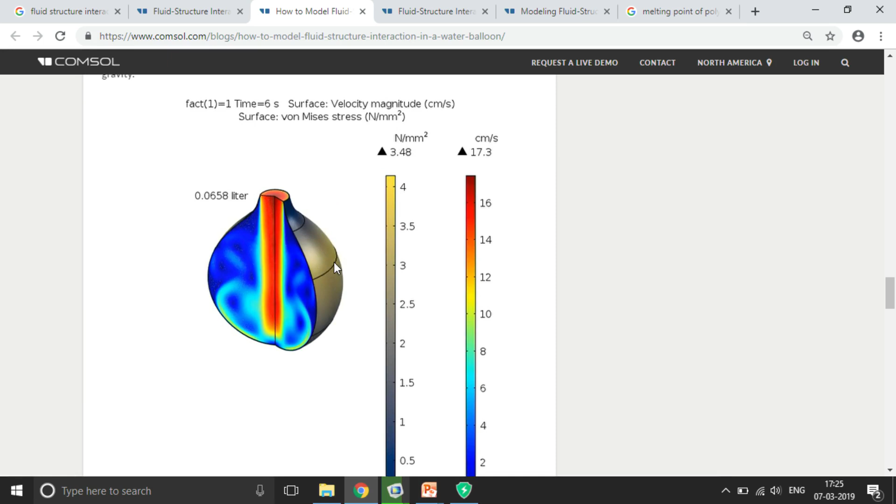Till the time it computes, there were a couple of blogs on fluid structure interaction that I would like to showcase. This is one of the blogs, and all the blogs have very nice animations, so it would be very nice to understand the physical intuition of the physics. For example, this is a water balloon during inflation. The velocity magnitude, the stresses being developed, all those things are available. So this is the fluid structure interaction problem where the balloon is getting filled.

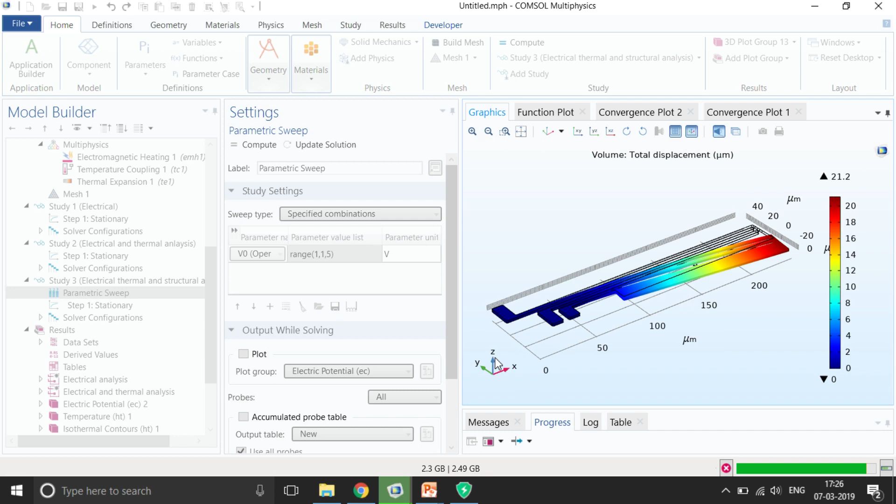So over here you can see what kind of solvers we are using. We are using a segregated solver. There are fully coupled solvers and segregated solvers. These are the two basic kinds of solvers. A fully coupled solver takes all the physics together. A segregated solver takes it step by step.

There are also two types of solvers, direct and iterative. Direct is more robust and takes less time, but it takes a lot of memory. The iterative solver takes longer time, but it takes less memory.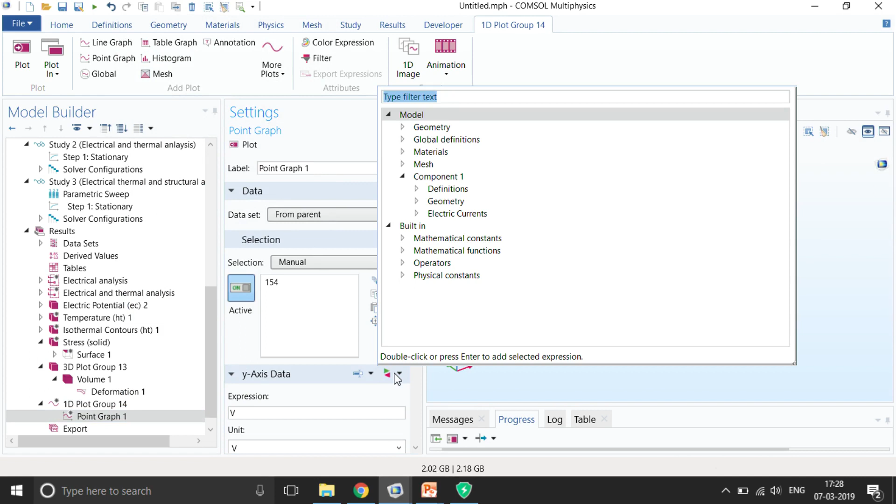So, now if you want to create a graph of how much the displacement changes if you change the voltage, I can just right click on the results and create a 1D plot group over here. I can create a point graph, and I can choose this point, and once I select the appropriate data set, that is study 3, I can ask it to plot the displacement. So, I search for displacement, somewhere over here, I double click on this, and I just click on plot.

So, automatically the x axis would be parameter in voltage and y axis is going to be my displacement. So, you can see that as the voltage increases, the displacement is also increasing, and it's a non-linear curve, that you have already seen. You can also enable the markers over here. So, you can use asterisk marks within data points, that is at whatever points you have swept you will get the results.

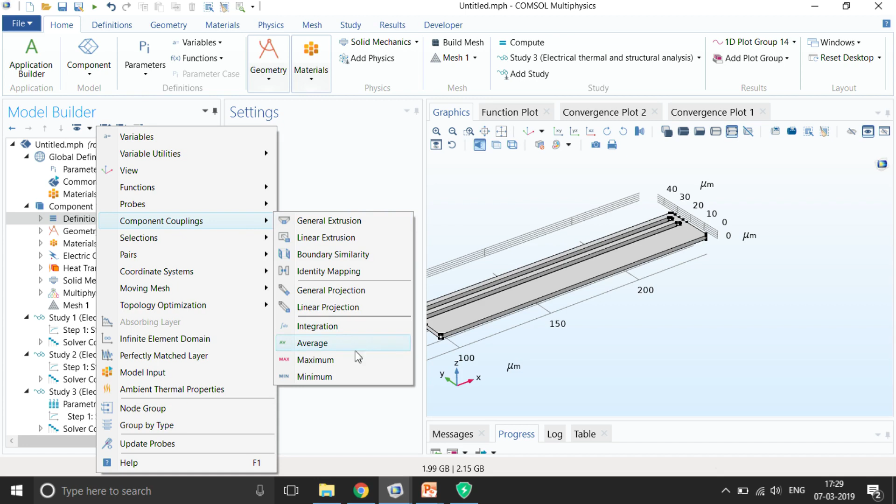Okay. Now, the next point is to see also the temperature. So, the temperature is the maximum temperature. To do that, I can just right click on my definitions, I can create a component coupling, and over here I can choose maximum. So, I choose the maximum over here, select the domain over here, and to make this max op1 operator available in the post processing, I need to right click on my study 3 and click on update solution.

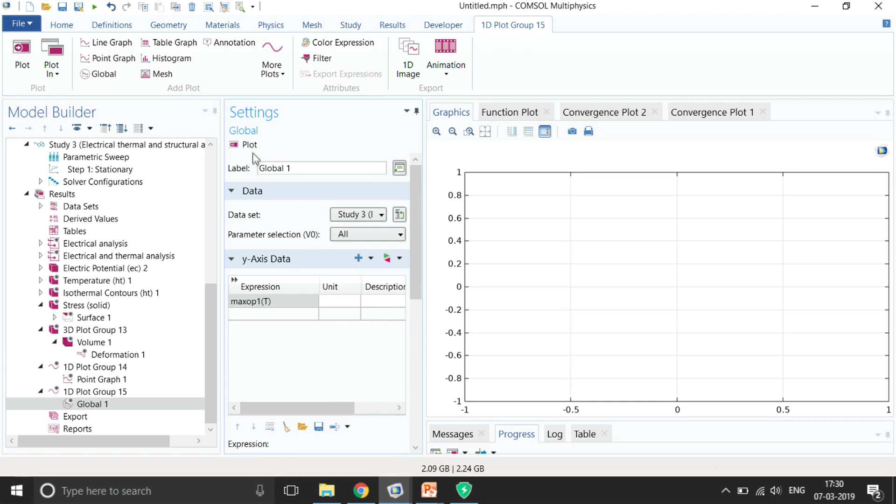That is it, and over here I need to create a 1D plot group again. So, I right click on the results, I create 1D plot group. In this 1D plot group, I right click on it and create a global plot. Here I will use the same operator max op1 for temperature, and I use the data set as my third data set and choose all of them. My x axis again voltage, and now you can see the max temperature is increasing as the voltage is increasing, and I can add asterisk marks within data points.

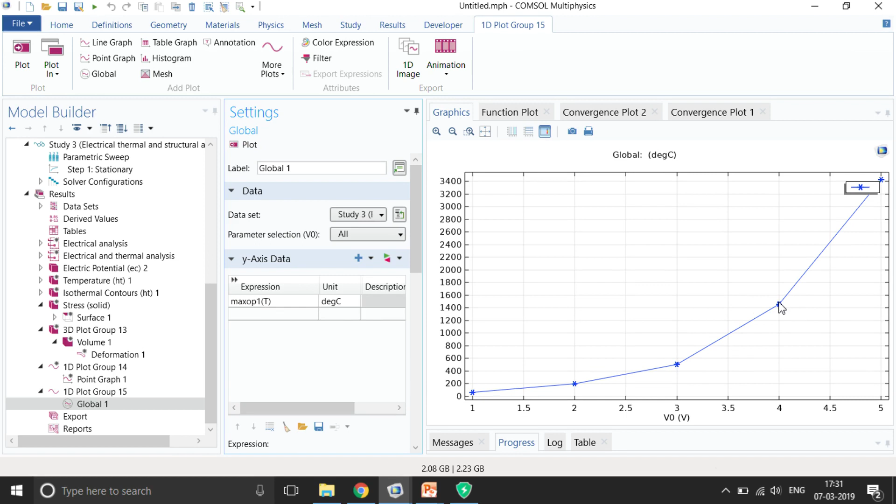So, if you assume that our melting point is around 1500 degree Celsius, so let us make it degree Celsius. If it is around 1500, then your device would only work till 4 volts. If you go more than 4 volts, then your device is going to melt, for example. Okay. So, this is how you can actually do the analysis. One more thing that I wanted to show is if you want to share this, so let me just group this first. Now, this is the electrical, thermal and structural analysis.

Now, if you want to share this particular model, for example, you could be a researcher, a student, or a professor who is taking this course, and you want to share this complete analysis with your colleague. If you are a professor, you would like to give it as an assignment for your students, and they want to change some parameter, run, and get different results at different operating ranges.

Or you could be an R&D person specialized in electrical, thermal and structural analysis, but you want to give this kind of model to your design engineers who would be designing the system. They don't need to go through the complete model, they are only interested in the results. So, they can vary the input parameters and finally get the results. They are not interested to see what is happening inside.

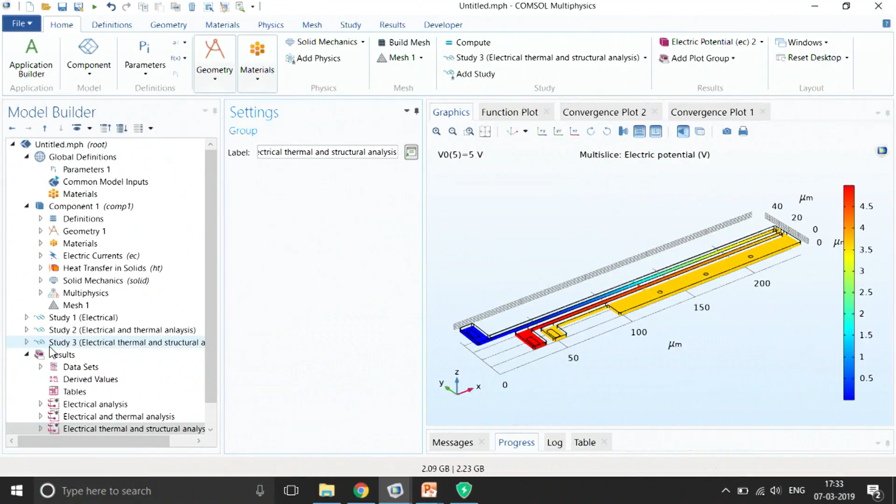It's very simple to create an app. That's what we will just show. To make the app, it's important to actually parameterize. So I can again go to my range, and I will write start_V, step_V, and stop_V. So these three parameters I have defined: my start voltage, my step voltage, and my stop voltage. I will click on replace.

Again, it's saying unknown model parameter because I have not defined them. So let me write over here start_V as 1 volt. It's always good to write whatever parameter along with the unit, so that there are no inconclusive results. Step voltage is 1 volt, and then the stop voltage is 5 volts. So it starts with 1, has a step of 1, and stops at 5 volts.

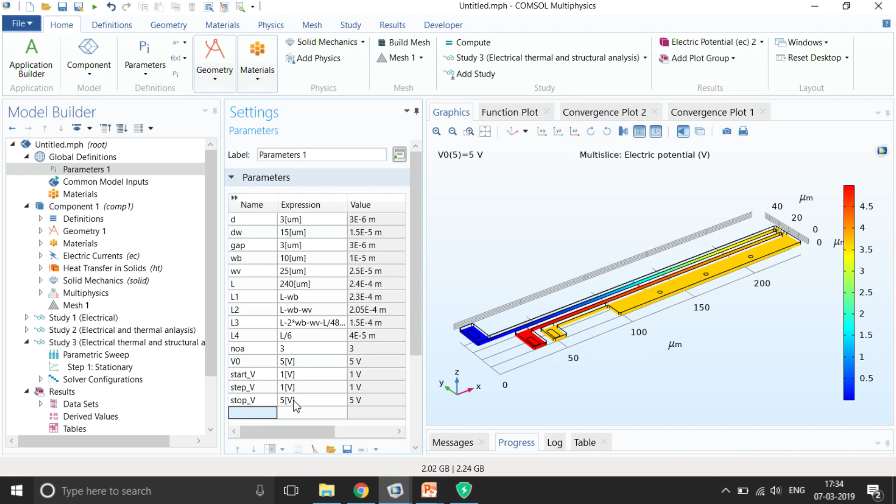Again, it's always good to check that there are no spelling mistakes and all those things, right. So I have defined the parameters. I know what plots I want to see. For example, I want to see my thermal plot over here, and 1D plot group 14 and 15. Okay, so I go to my application builder. With only one click I can go to my application builder, and over here I can just click on new form.

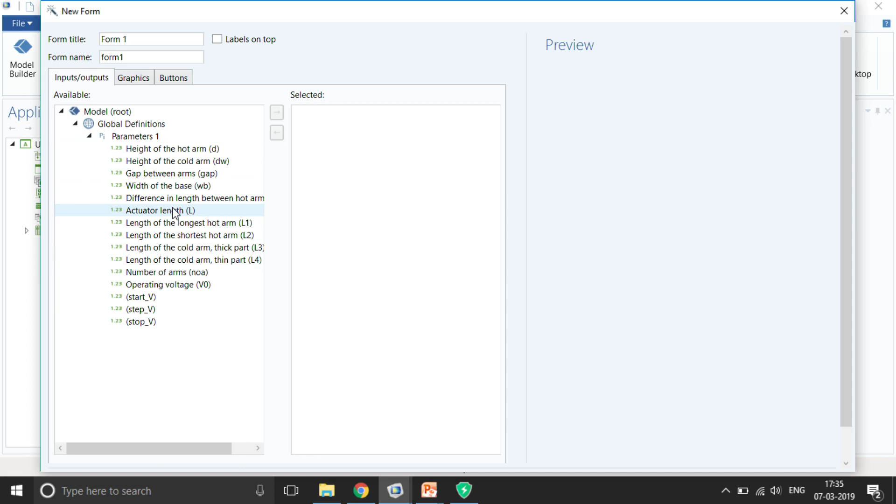Once I click on new form, it's asking me all the parameters that I want to change. For example, if you want to change the geometry, all those parameters can also be given. As of now, we will give the start voltage, step voltage, and the stop voltage. The actuator length could also be given, for example. So if you want to vary the length and see how the temperature is varying, that also is possible.

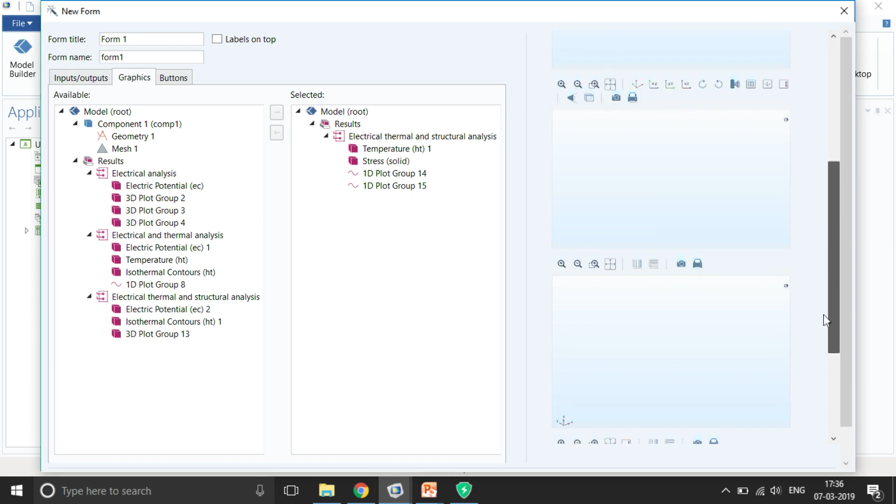Then the next thing is the graphics. What do you want them to see? For example, you want them to see the temperature, the stresses or the displacement. You also want them to see how the rise in temperature occurs with the voltage, and the displacement with the voltage. On the right side, you will see the form that is being built, and then what buttons or what kind of analysis they want to perform.

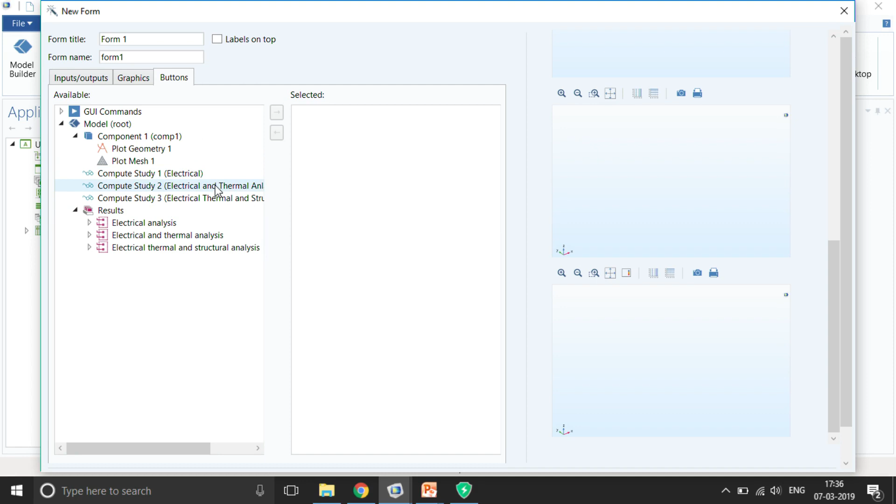They want to do only electrical analysis, electrical and thermal, or electrical, thermal and structural. So as of now, let me give electrical, thermal and structural analysis and click on add selected. And if you want, you can also add all the studies, the first and the second one. And just click on OK. So these are my first results over here. I can just move and modify all of them. Make it a little bit larger, so it's easy to visualize.

Okay. So now the compute button was somewhere over here. So here I can change the text as electro-thermo-structural study. Okay, so I can keep it somewhere over here. I can move my actuator length somewhere over here.

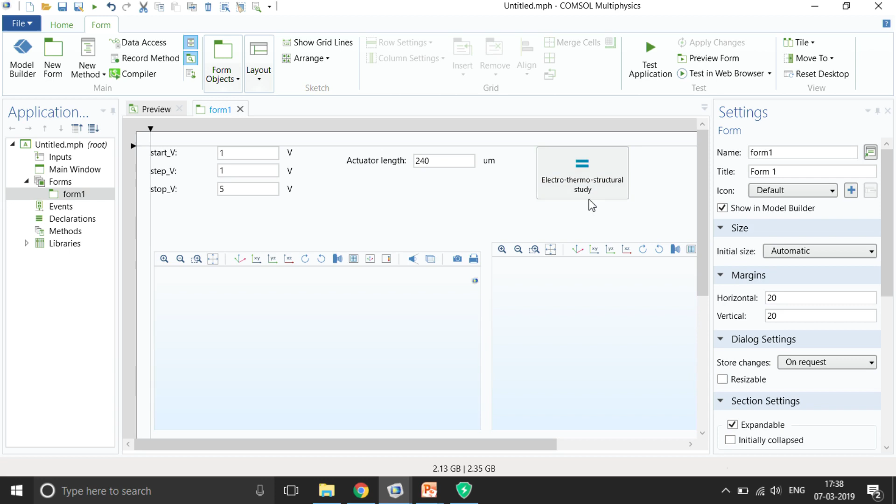So these are my voltage conditions, these are my geometry conditions, and then this is my compute button, for which kind of analysis I want to do. So I click on test application. So this is how your app would look. Your professor, your students or your design engineers can actually go ahead and change the actuator length, for example 300 micrometers, and then just click on compute, and the next set of results would be coming up.

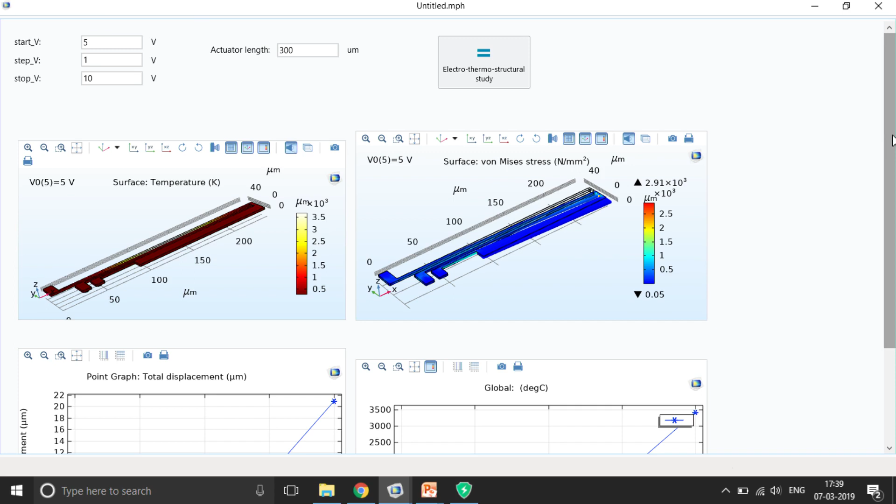Okay, they can also change the start voltage, for example 5, with a step of 1 to a stop of 10, and then they can compute the study and see the change in the results. You can also add material properties as parameters and change them over here. So this could be shared with your students as a standalone thing, and they can vary all these parameters and gain a lot of understanding of the system by themselves. Okay, so this is the complete simulation in COMSOL.